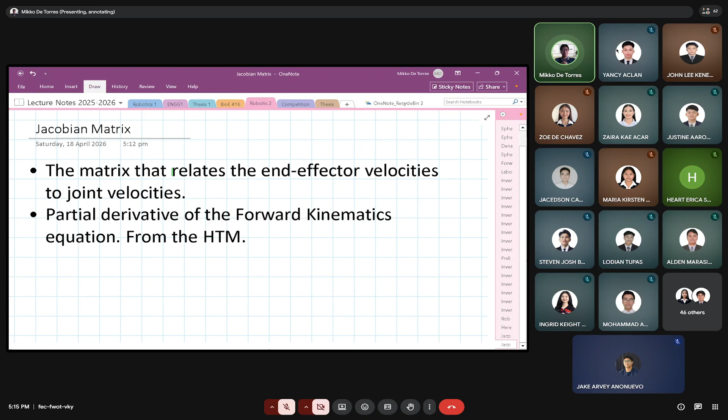Excuse me. So we can derive the Jacobian matrix by doing the partial derivative of the forward kinematics. So the purpose of the Jacobian matrix: it is the matrix that relates. Siya nagre-relate ng end effector velocity at saka ng joint velocity. Okay, so ano ibig sabihin nun? Ibig sabihin ng Jacobian matrix is the matrix that relates the end effector velocity to joint velocities.

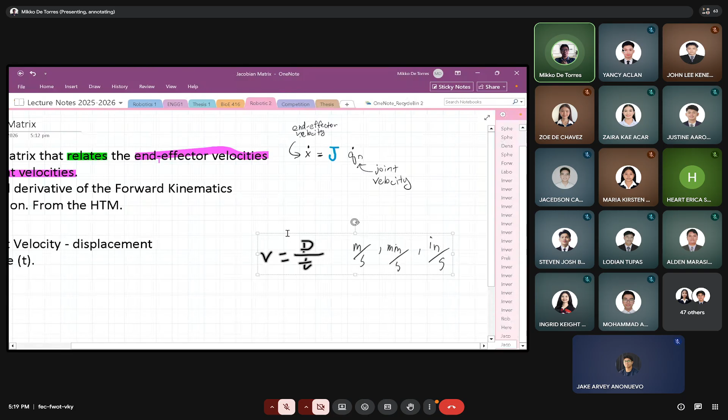Then, in physics, you also learned average velocity. Average velocity is change in displacement over change in time. So, the formula is this: velocity is equal to displacement 2 minus displacement 1 over time 2 minus t1, or delta d over delta t, and its unit is also unit of length over second. Okay, so meters, millimeters, or inches.

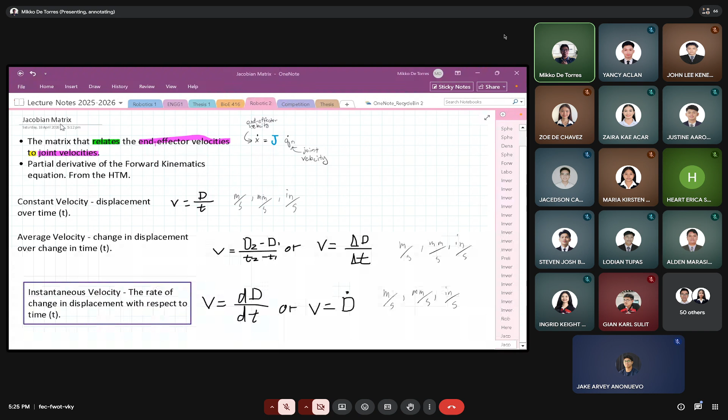So doon sa control system ninyo, na-review kayo ng displacement. So ang X ay displacement sa control system. X is displacement. Then the derivative of that displacement is the velocity. The derivative of X is the velocity.

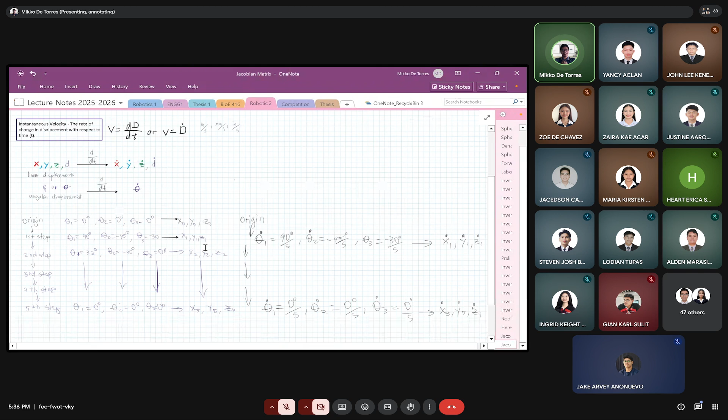So every movement of our robot, every change in joint variable, there is a corresponding position vector. So every movement, there is also a corresponding velocity for each movement. And for each velocity, there is also a corresponding velocity at the end effector. Or if this is inverse velocity, every velocity at the end effector, there is a corresponding velocity at the joint variable.

So, dahil every movement ng ating robot ay iba't iba ang joint velocity, iba't iba ang position vector velocity. So, we are using instantaneous velocity to monitor that, to compute that, because instantaneous velocity is the velocity at the current moment.

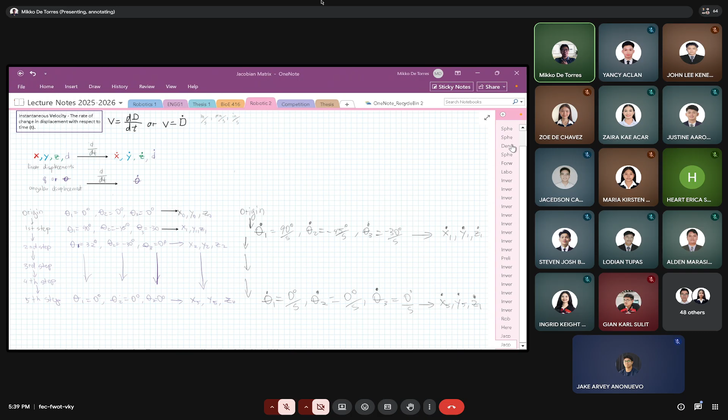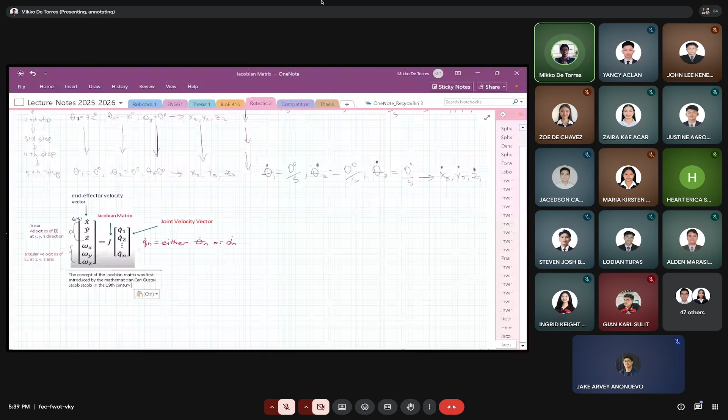Punta na tayo sa Jacobian matrix ulit. So, let's go back to Jacobian matrix. I hope instantaneous velocity is clear to you, why we are using it in robotics. So, this is the working equation of Jacobian matrix. Ito yung kanina, itong x prime is equal to J times qn prime.

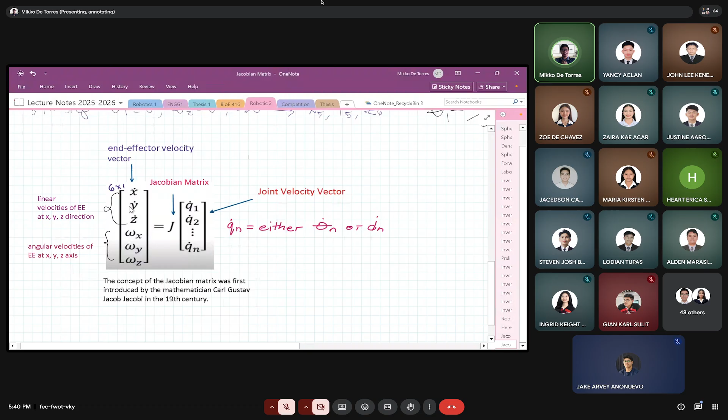Ito yung naka-vector na yung ating end effector velocity at naka-vector na rin ang ating joint velocity. So, end effector velocity vector consists of the linear velocities of end effector in x, y, z direction. Ito, si x prime, y prime, and z prime.

Who's that? Wait lang. Who's that? Naghang ata ako. Naghang. Nag-DC. Wait lang ha. Who's this ba? Sino to? Si Cedric Bianson. Hindi na mapapasok si Cedric. Okay. Sorry. Balik na tayo dito.

End effector velocity vector consists of the linear velocity of end effector in x, y, z direction, itong x prime, y prime, and z prime, and angular velocities of end effector about x, y, z axis. So, ito yung omega x, omega y, and omega z. So, the size of the end effector velocity vector is a 6x1 vector. So ito yung mga velocities at the position vector: x prime, y prime, z prime, omega x, omega y, and omega z.

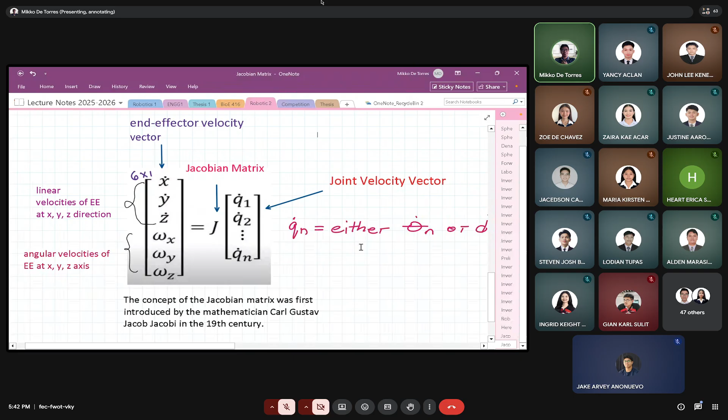Then this one is the joint velocity vector. Ito naman ay yung mga joint variable ng mechanical manipulator na given. So if the given mechanical manipulator's joint variables are theta 1, theta 2, and theta 3, inside the joint velocity vector the joint velocities are theta 1 prime, theta 2 prime, and theta 3 prime. And also, if the mechanical manipulator's joints are prismatic, the joint variable is d. So the joint velocity is d prime.

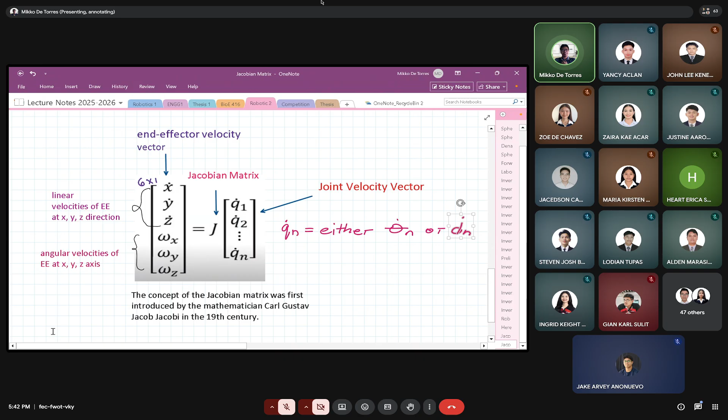So the concept of Jacobian matrix was first introduced by the mathematician Carl Gustav Jacobi. Pa-check na lang yung tamang pronunciation. Pero ang naalala kong pronunciation ng Jacobian matrix ay Jacobian. So, pa-check na lang din ng pronunciation sa internet, kung tama ba yung pronunciation ng Jacobi.

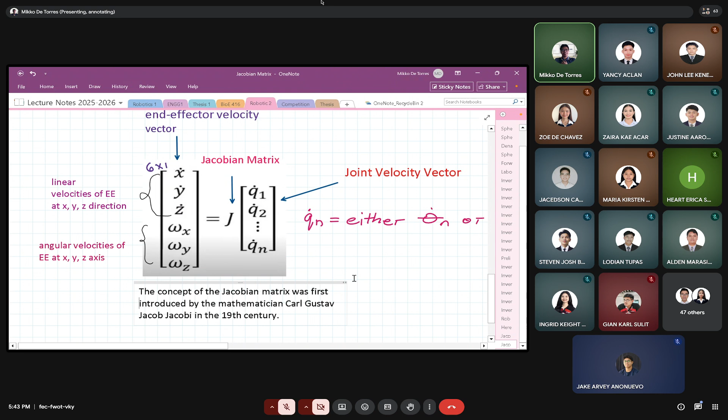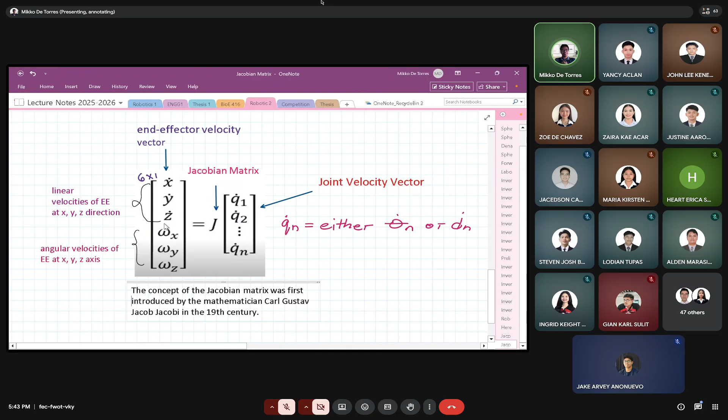So, Jacobian matrix is a matrix. Itong end effector velocity ay vector, joint velocity ay vector. So, this is the full form of the Jacobian matrix. Isa siyang matrix. Lagay uli natin ito.

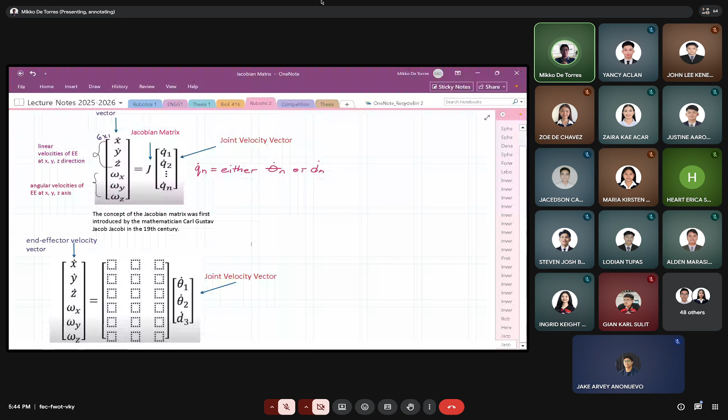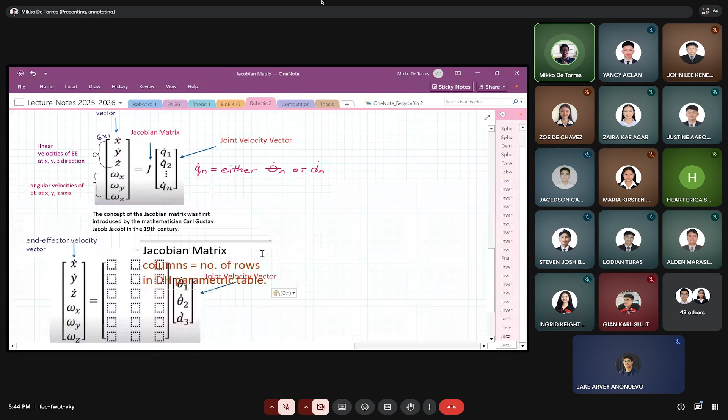End effector velocity vector and joint velocity vector. So in the middle is the Jacobian matrix. Okay? So because this is a matrix, it has columns and rows. Excuse me. So the number of Jacobian matrix columns will be based on the number of rows in the DH parametric table. Okay? Jacobian matrix columns will be based on the number of rows on the DH parametric table.

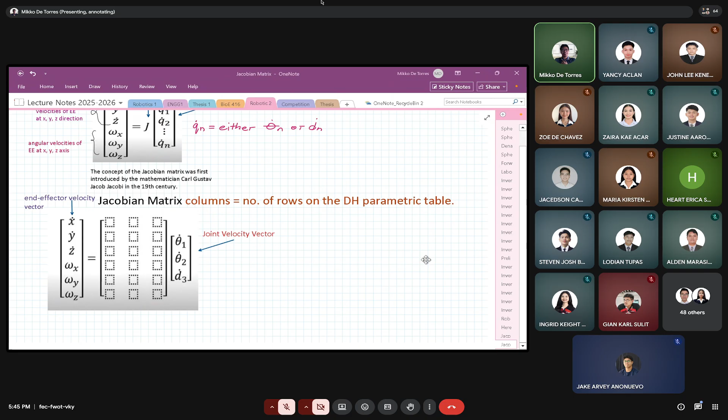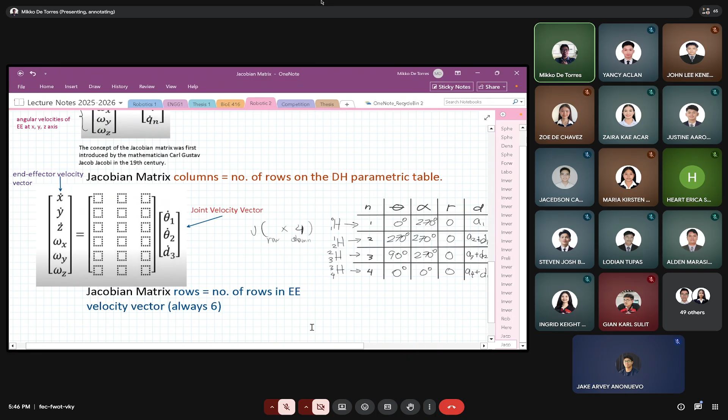Okay? While the number of rows will be based on the number of rows of the end effector velocity vector. Jacobian matrix rows is equal to the number of rows in end effector velocity vector. So the number of rows at the end effector velocity vector is always 6. So if the given mechanical manipulator has 4 rows at its parametric table, the size of the Jacobian matrix is 6 by 4. Because the number of rows of the Jacobian matrix depends on the number of rows in the end effector velocity vector, which will always be 6. While the columns will be based on the number of rows at the parametric table. Okay?

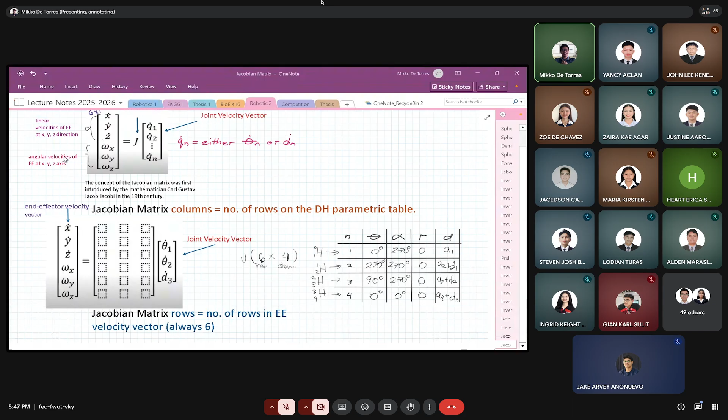Understand, class? So for example, again, we have here a parametric table whose rows are 3. So 3 rows in our parametric table. So the size of the Jacobian matrix will be 6 rows by 3 because the rows of its parametric table are 3. So the Jacobian matrix is 6 by 3. If the rows of the parametric table is 6, the size of the Jacobian matrix will become 6 by 6. So the larger the robot, the higher the number of degrees of freedom of the mechanical manipulator, the bigger the size of the Jacobian matrix.

So this is what I'm telling you since Robotics 1, that our homogeneous transformation matrix from 4 by 4 will become 6 by 6, 6 by 8, 6 by 7. So, for a 3 degrees of freedom mechanical manipulator, 6 by 3. Or for Cartesian, 6 by 4, because there are 4 rows in the parametric table.

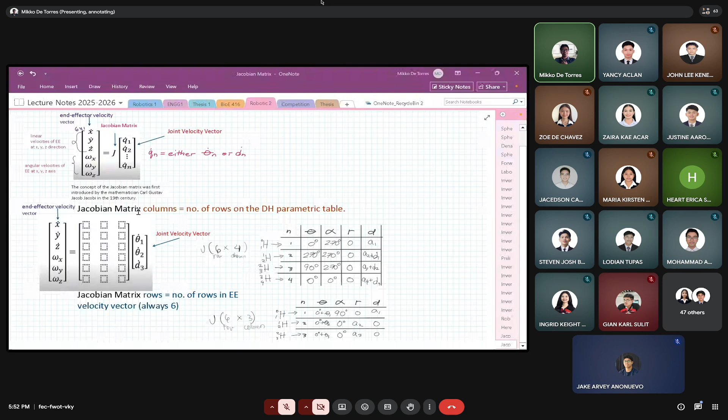So, joint velocity vector, as I said earlier, if the given mechanical manipulator is articulated, the joint velocity vectors are theta 1 prime, theta 2 prime, theta 3 prime. So, articulated. Where is it? Okay. If it's Cartesian, then D1 prime, D2 prime, D3 prime. If it's SCARA RRP, then theta 1 prime, theta 2 prime, and D3 prime.

So if it's an articulated 6DOF, the joint velocity vector is theta 1 prime, theta 2 prime, theta 3 prime, theta 4 prime, theta 5 prime, and theta 6 prime. So these are all derivatives, derivatives of the joint variables. Okay? There, joint velocity vector.

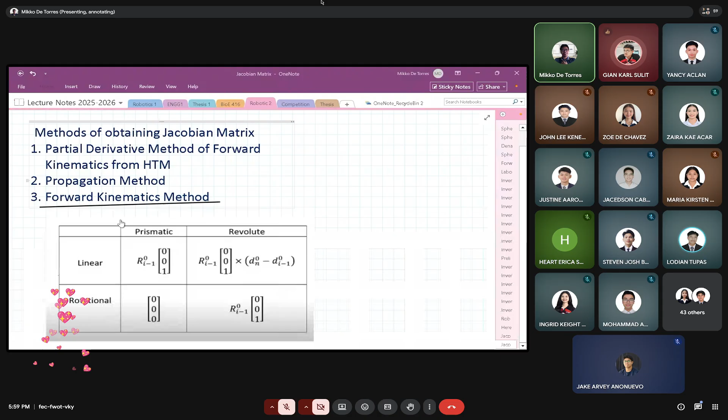So, based from the formula, what is linear? What is rotational? In our Jacobian matrix, for example, this Jacobian matrix. Teka, buhayin lang natin to. So for example, we are deriving the Jacobian matrix of SCARA RRP. Okay, RRP. Kunyari wala pa to. Susulat ko yan.

Okay, RRP. So, the linear here are these first three rows. These are the linear. Ito ang linear. Then, the rotational is the last three rows of the Jacobian matrix.

Where is that? Mas malakas pa internet ko sa bahay. Bakit ang bagal ng internet? Sabado ngayon na. Yan. Okay.

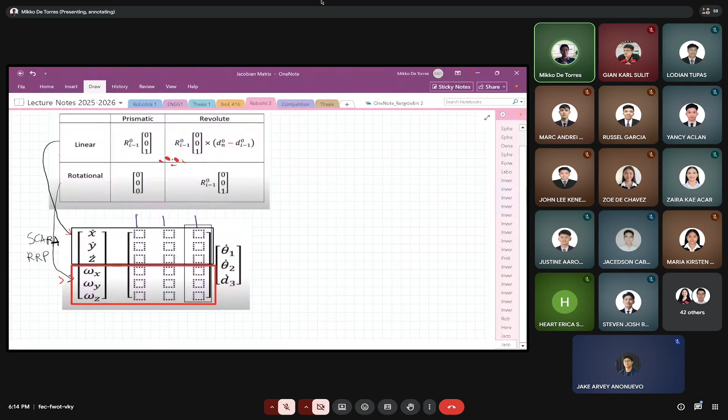So, the given is a SCARA manipulator. The joints are the columns. The first column is revolute because this is an RRP manipulator. The second column is also revolute. The third column is prismatic. So, based from the joints, if it's revolute, you will use this formula. If the joint is prismatic, you will use this formula at the linear rows.

So these are the linear rows, x prime, y prime, and z prime. For the rotational rows, omega x, omega y, omega z, if it's prismatic, you will use this formula. If it's a revolute column, you will use this formula for the rotational rows. So for example, the first column is revolute, so you will use this formula, and for the rotational rows you will use also this. So you will use this at column 1.

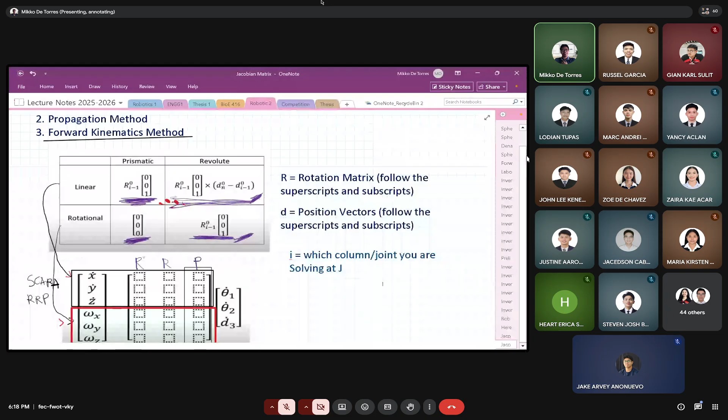I is which column or joint you are solving at. So, if you are solving column 1, I is 1. Okay, for example, ito.

If you get the rotation matrix from the homogeneous transformation matrix R01 and you are using it at column 1, so the I is 1. If you are using the rotation matrix from homogeneous transformation matrix 1, 2, and you are at the second column, so the I is equal to 2. So I: solving at column 1, it is 1. If you are solving at column 2, it is 2. If you are solving at column 3, I is equal to 3.

Then, N is the number of columns or joints of the Jacobian matrix. So, it is just the number of columns.

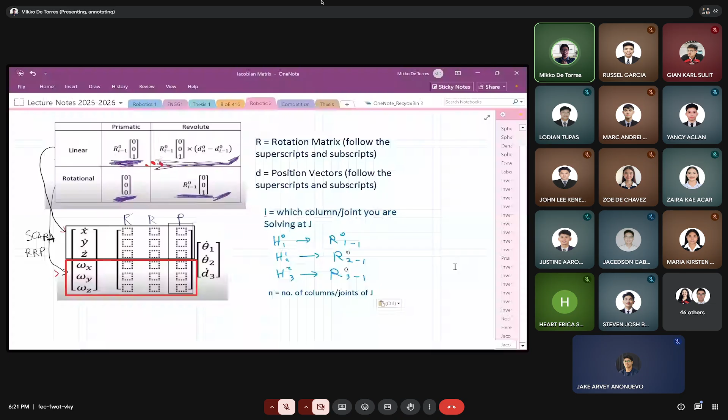Sorry. You will obtain first the homogeneous transformation matrix. From the homogeneous transformation matrix, you will obtain the rotation matrices needed, for joint 1, joint 2, and joint 3. So each column represents a joint of your mechanical manipulator. Okay? So, print screen.

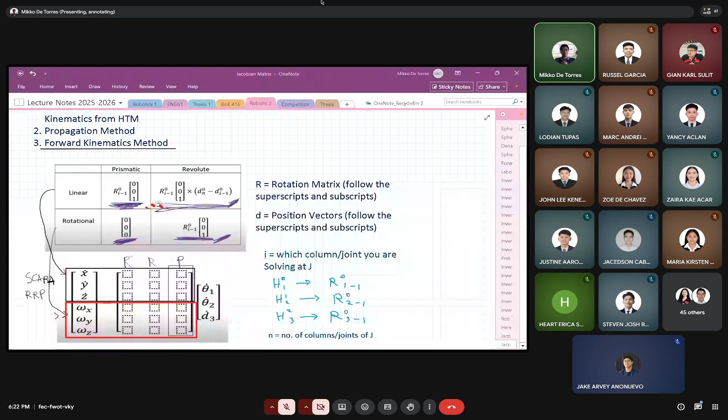So, let's proceed to our first example. Our first example is a Cartesian manipulator.

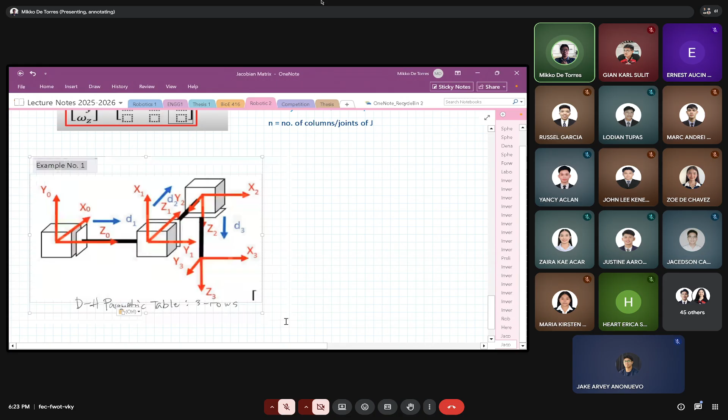Okay, this is our first example. So, in this first example, I will not build the parametric table. The parametric table is already given. The D-H parametric table has 3 rows. This Cartesian manipulator has 3 rows.

Can you still see it? Is it showing? Can you see my OneNote? Yes, sir. Okay, the OneNote is visible. Then, where was it?

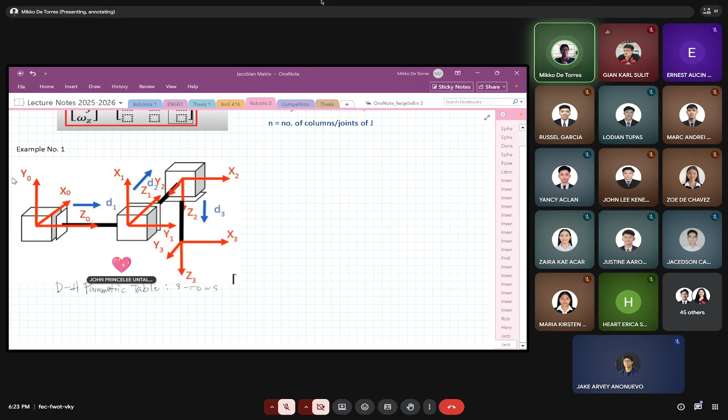So, what is the size of the Jacobian matrix, class, if the parametric table of this Cartesian manipulator has 3 rows? What will be the size of the Jacobian matrix? Anyone? 6? No, it's already written. The D-H parametric table is 3 rows, so it's not just 6. 6 by 3. Okay, the size is 6 by 3.

So our working equation will look like this. Each joint is prismatic, so each column represents a prismatic joint. The rows are 6. Then, the joint velocity vector is composed of the derivatives of the joint variables: D1 prime, D2 prime, and D3 prime. So this is our working Jacobian matrix. We will complete it by solving for each element of the Jacobian matrix.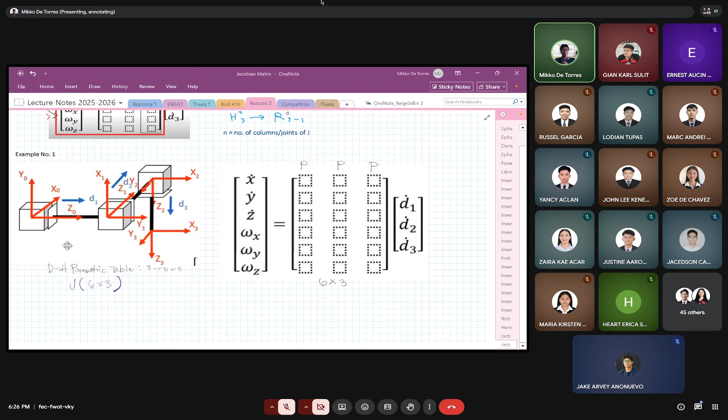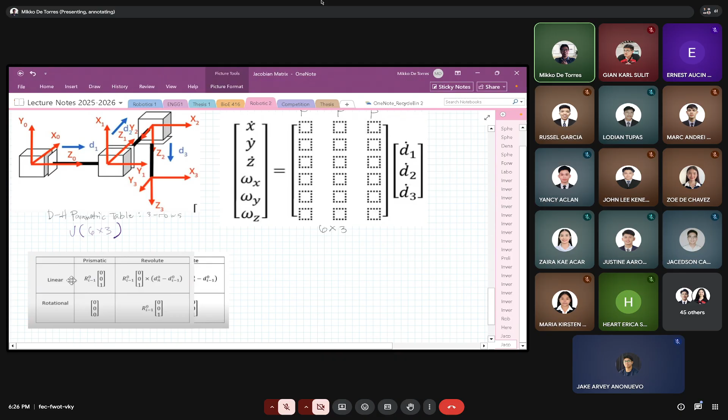So let's use our formula and our working Jacobian matrix. All columns are prismatic, so for our linear rows, we will substitute the formula of prismatic for linear. Then for our rotational rows, we will substitute the zero vector 0, 0, 0. Okay, so we will substitute this.

We will substitute this to this and this. Okay. We will substitute that, so it will look like this.

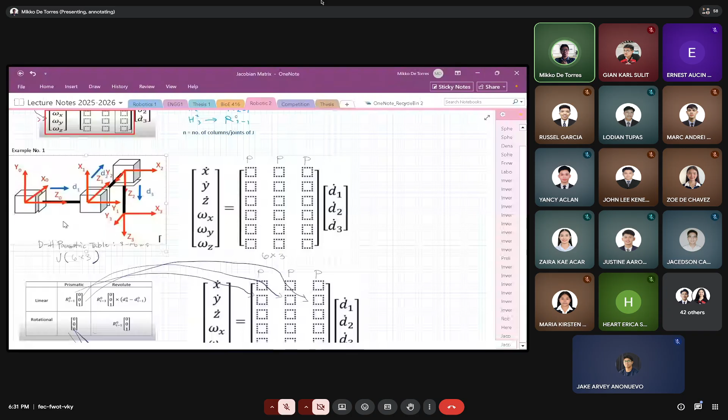So why are all of these 0, 0, 0? It is because this is a prismatic joint. This is a Cartesian manipulator. Because this is a Cartesian manipulator, all joints are prismatic, so there are no rotations. So the rotational rows are puro 0, 0, 0. While the linear rows have the rotation matrix. So we will solve each column.

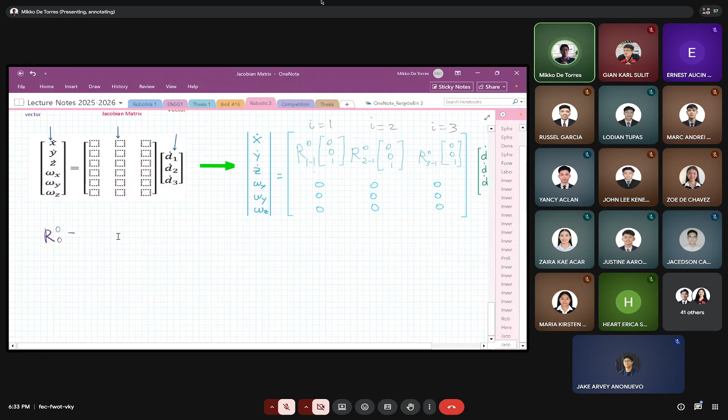Okay, so we will solve first what is R raised to 0 sub 1 minus 1. So R raised to 0 sub 1 minus 1 is R00. So what is R00 muna, class? If you remember, the rotation matrix was derived from the concept of projection, frame 0 and frame 1. So galing ito sa concept ng projection.

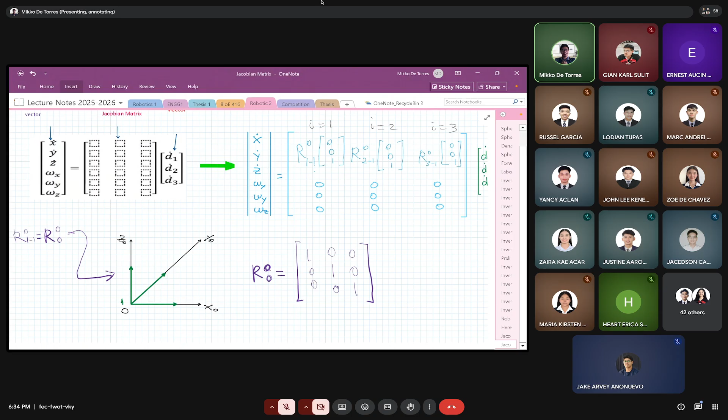So R raised to 0 sub 0 means our rotation matrix is not moving, or there's no movement from the origin, so our rotation matrix here looks like this. Are you familiar, class, with this matrix? What kind of matrix is this? The diagonal is 1 from left to right. This is the identity matrix. So R00 is an identity matrix.

So we will now multiply the identity matrix to 0, 0, 1. This is 3 by 3, this is 3 by 1. Same inners, so the final answer is the outers: a 3 by 1 vector. So what will be the answer, class? What will happen if we multiply a matrix or a vector to an identity matrix?

Sabi ni Ornales ay 0, 0, 1. If you multiply a matrix or a vector to an identity matrix, the product is what you are multiplying, because the identity matrix is like number 1. So we are just multiplying 1 times 0, 0, 1. So the answer here is 0, 0, 1. So now we solve this first column; we will substitute this to our first column.

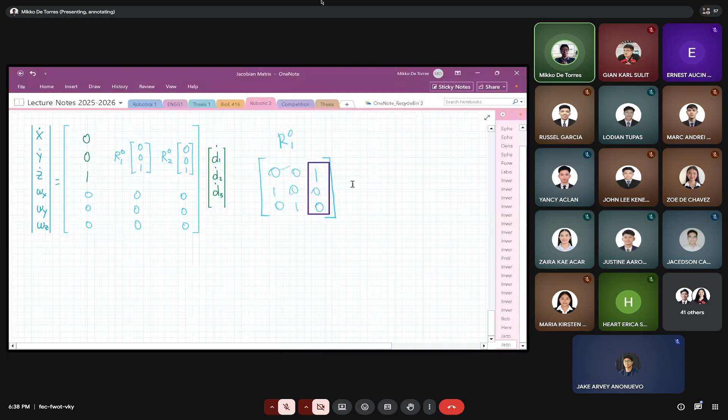This is R01. Okay, so later we will multiply. So R01 times 001. R01 times 001. So this is 3 by 3. This is 3 by 1. Same inners, so the outers will be the size. So the answer will become 3 by 1.

Okay. So if you can't remember, class, how to multiply a 3 by 3 matrix to a 3 by 1 vector, remember, class, that if you are multiplying a 3 by 3 matrix to a 001 vector, the answer will become the third column. Okay? So the multiplication of this is you will multiply the row. Each element of the row, you will multiply it to the row of the vector. So 0 times 0 is 0 plus 0 times 0 plus 1 times 1.

I think I was wrong there. Correct. 0 times 0, 0 plus 0 times 0 plus 1 times 1 is 1. 0 plus 0 plus 1. Then, second row, 1 times 0, 0 plus 0 times 0 plus 0 times 1 is 0. So 0 plus 0 plus 0 is equal to 0. Then, third row, 0 times 0 plus 1 times 0 plus 0 times 1, 0. So it is equal to 0. Okay? So it's the same as the third column of R01.

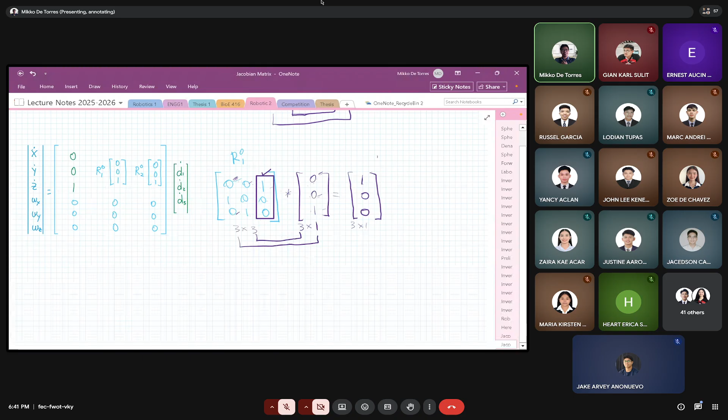So again class, the technique here is if you are multiplying a 3 by 3 matrix to a 001 vector, the answer is the third column of the 3 by 3 matrix. Okay? So that's our second column. So, we will substitute it to our Jacobian matrix. So, it will look like this. Okay. So, we're on the last column now, the third column.

So, we will solve first what is R02. Wait, please take a screenshot first of R01 times 001. Okay, screenshot done, class? Okay. Let's go to R02 times 001.

Okay, so R02, we will solve first what is R02 before we multiply it to 001. So R02 came from R01 times R12. We did not solve first the homogeneous transformation matrix of H01 and H12, so I will just give it. This is R01, it's up there. We'll multiply it by R12. R12 is just given here for speed. So R12 is